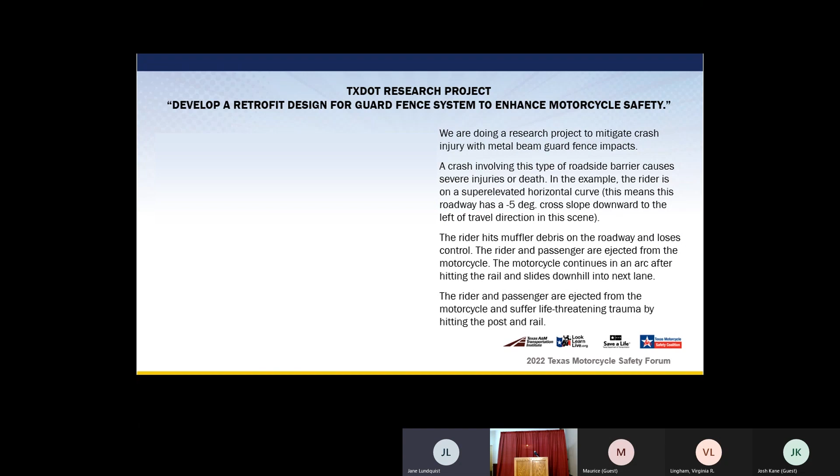The original design that we looked at to try and mitigate these kinds of barrier collisions and the dangers they present was to put a skirt on the post and a cap over the rail. We thought this would help. As you see, when someone hits a post, it's almost like a knife. I mean, it's going to take fingers, arms, heads, legs, whatever.

So we don't want anyone hitting that post. We're trying to protect the riders if they are ejected from their motorcycle. So you can see in the diagram on the right that we have the cap, and we also had a skirt underneath that block out. What it looks like is what you see in that left photo.

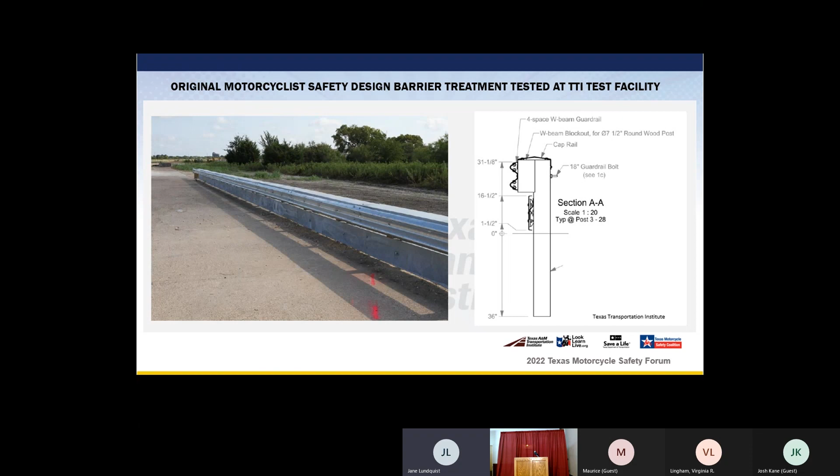Let me introduce this. This is the TTI testing facility, and out here we were doing upright rider cap rail tests. So if you can make that video go, just give it the start.

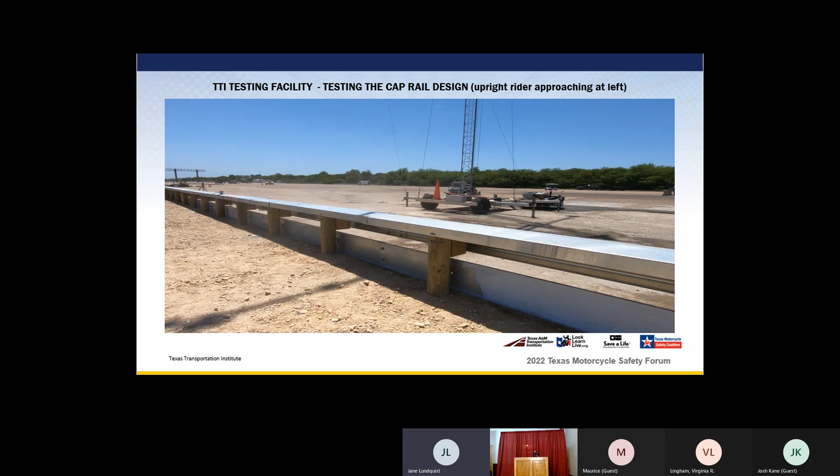As you can see, the rider was able to slide across the top without hitting the top of the posts, and they were not hitting the top of that metal beam, that W beam at the top there, the sharp edge. So let's go to the next slide and see it from a different angle. If you start the video.

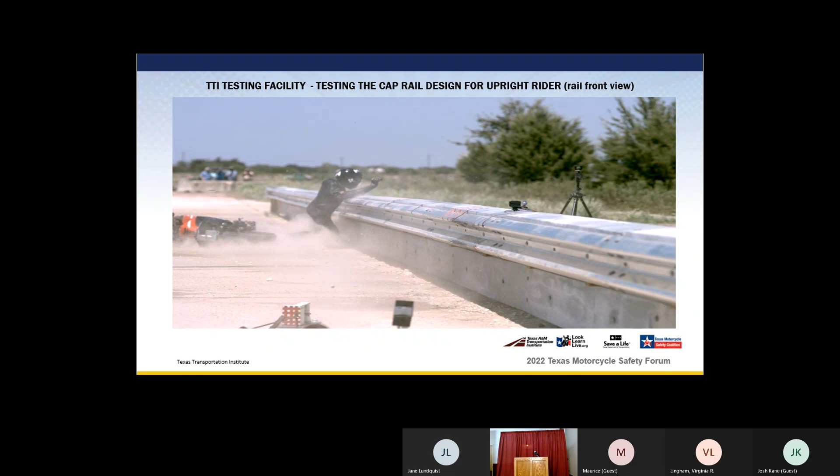As you can see in this video, the rider is protected across the top as they slide across that cap. It keeps them from being cut by the metal beam guard fence itself. It is a violent collision with a metal beam guard fence, but the top of the cap worked and it passed its testing.

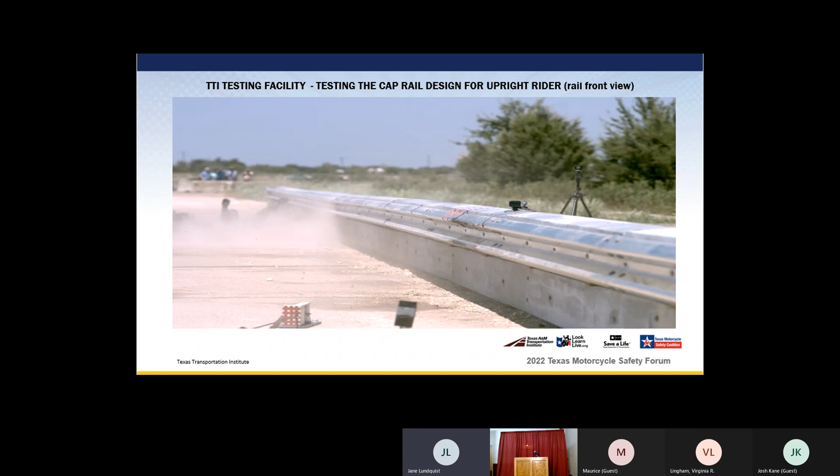Let me go to the next slide, please.

We also did a sliding rider check because sometimes when someone's ejected from the motorcycle, they go sliding off on their own while the motorcycle goes in another direction. In the upright rider videos that you saw, the cap worked well and it met the criteria we were designing for. However, when we tried the sliding rider impact with that skirt panel, we did not have satisfactory results, so we've had to go back to the drawing board and do new testing.

We can go to the next slide.

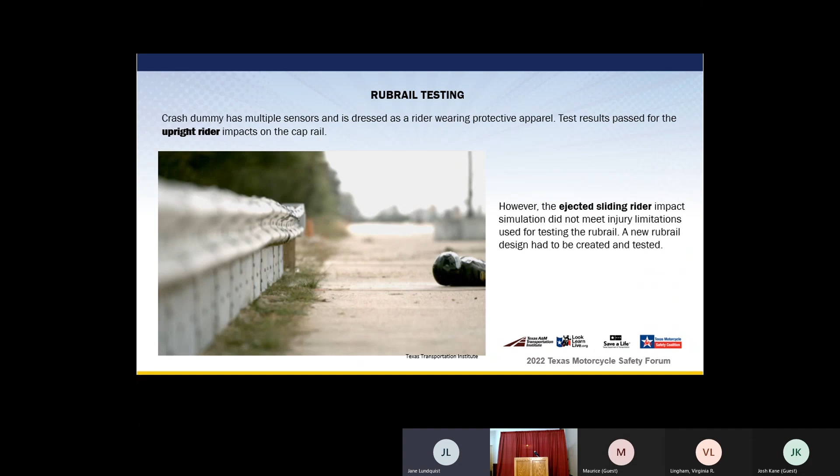What we've done here is left the cap in place because that seems to work. The W beam is that thing that looks like a 3 on the side there, that's the typical beam on a guard fence. But below, instead of putting that skirt up against the post, there is a Z bracket which will absorb the energy from the motorcycle or the rider hitting it. So we feel that's going to work better for us.

We've had some issues with COVID protocols where we weren't able to do some of these tests, but they are increasing now. I think they're scheduling more, so we may have some better results coming up soon.

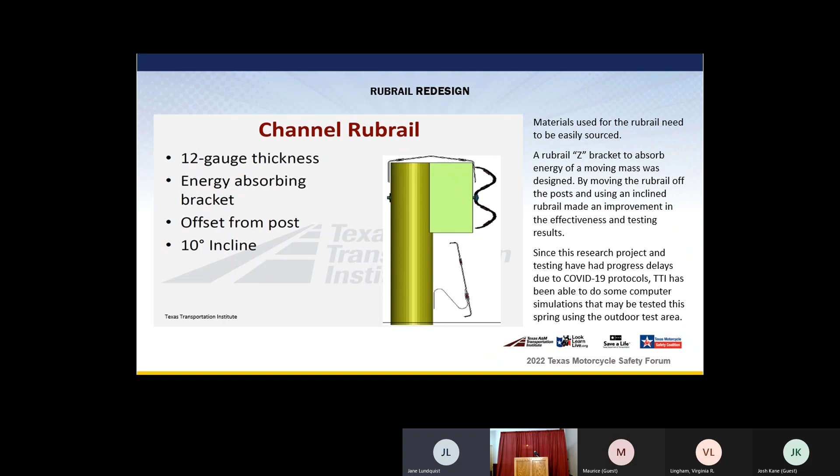We can go to the next slide, please.

TxDOT is the lead organization for a National Pooled Fund motorcycle study. As I introduced before, we have 5 other states joining with us. It's similar to the TxDOT research we're doing, but we're using a cooperative approach to find safety solutions and up-to-date examination of best practices for motorcyclist roadside safety that may be used in other states. We can share solutions and find ways to treat problems we've had difficulty resolving. We will be trying to implement any of these designs into the MASH manual.

If we go to the next slide, please.

TxDOT is also working on trying to provide better pavements at curves. Although this roadway is not in Texas, it looks like it'd be a daunting road to ride because you'd have left curves and right curves. But anywhere we have moisture in the shade, anytime there's moisture on the road, we have problems with friction that holds us, and we can't make our curves meet safety turning ability. So we are trying to review crash history and focus design attention on areas that may require better skid resistance and maintenance needs. We do have high surface friction materials that we put on curves, and although it's not a blanket change for the whole state, we focus on the areas where we've had issues and where we feel it's beneficial.

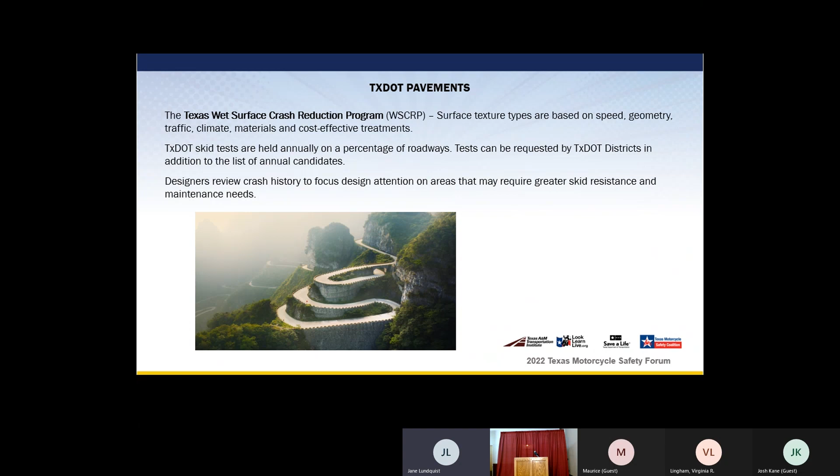This is something that we have brought to the attention of the Federal Highway Administration.

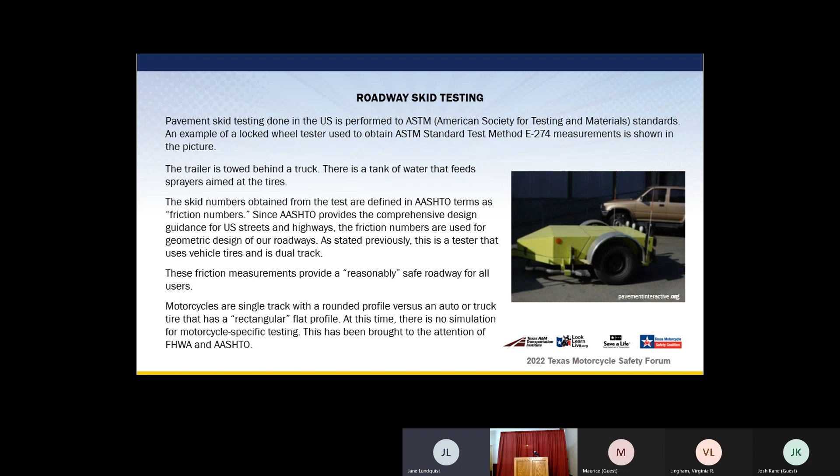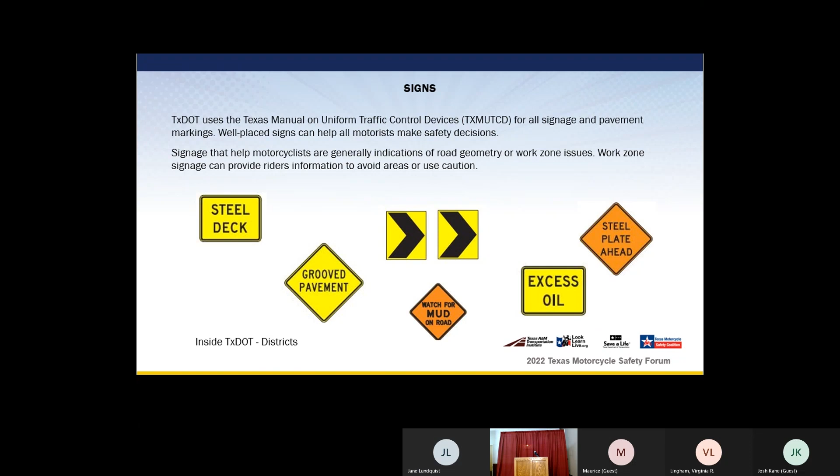If you should be on a ride and find a problem with a road, I know that we have wayfinding being tried and used to notify riders about issues. But to report a roadway problem and have it repaired, go to inside TxDOT, select districts, find the district or county, and there's a selection there for the county where you found the problem to report it. I believe the email for the district engineer is there, and administration of that office will make sure the information is passed along to the appropriate area office so they can examine the issue and get it fixed. We don't want to leave a pothole or hazard on the road. So if you find something and want to report it, go directly to the website and speak to the people in the district.

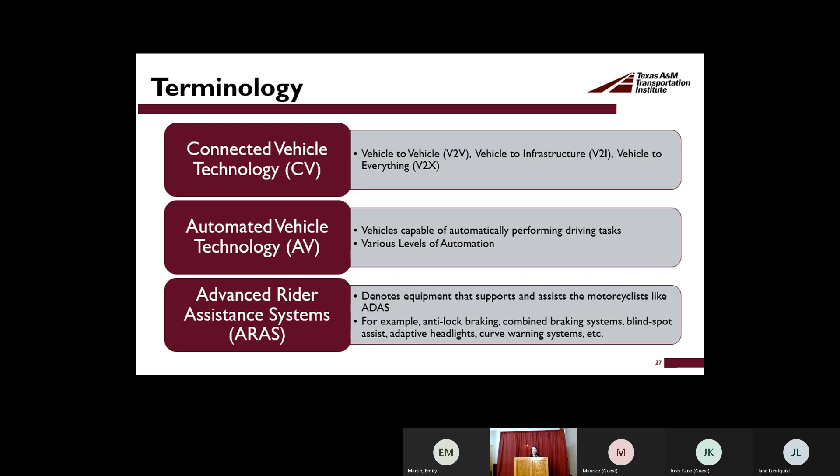But for this project, we are really trying to understand, from the federal side and for riders, what their thoughts and feelings are on both connectivity and ARAS specifically. But our findings, they could apply to automated vehicles.

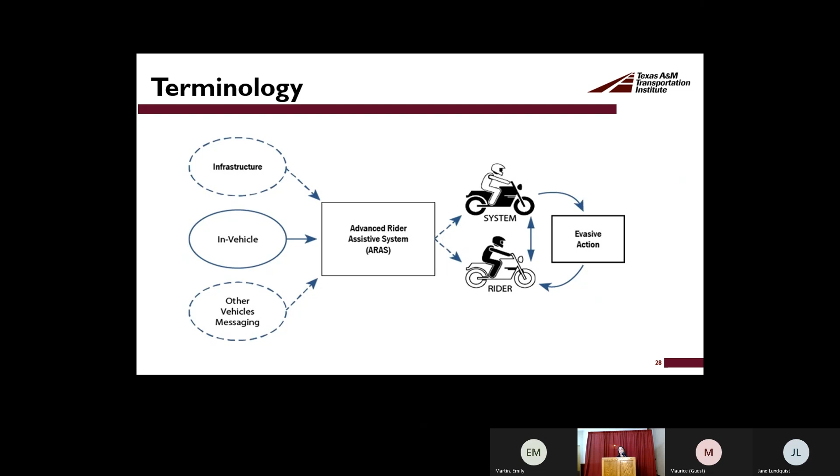So looking at the potential impact, and the reason why crashes and fatalities are very much overrepresented - some have even said this is a global health problem. About 3% of registered vehicles in the United States are motorcyclists, but yet they account for about 14% of fatalities. And this is even seen when comparing motorcyclists to drivers when you look at VMT rates.

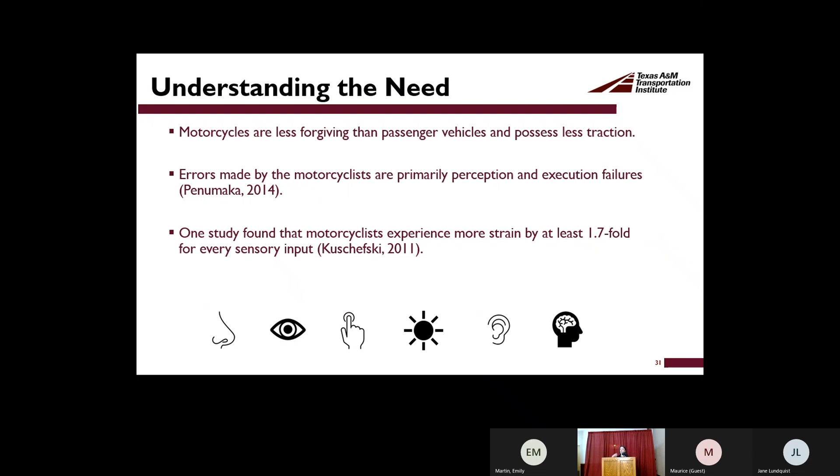Part of this problem we found through our research, and focus group sessions, is that the margin of error for motorcycle riding is much less than that of a passenger vehicle, and often this leads to both perception and execution errors. One study even found that when comparing a motorcyclist and driver, often motorcyclists are experiencing sensory inputs by at least 1.7-fold of their passenger vehicle counterparts. So this includes vibration, noise, climate, making it much more difficult to stay focused, but also puts a very big emphasis on having high situational awareness throughout riding.

So where connectivity comes into play is it's really that extra layer of safety. Starting with the first layer, most basic being your PPE, but having connectivity is providing maybe perhaps more separation between the motorcyclist and the roadway.

And I think also my last slide might have been a little misleading, but there's also a lot of drivers that cause accidents with motorcyclists, and often about 70% of those are due to perception errors on the driver's end, so not seeing the motorcyclist. Having connectivity can not only increase the motorcyclist's visibility by informing the driver that they're nearby, but then also inform the motorcyclist of upcoming conditions so they can stay prepared.

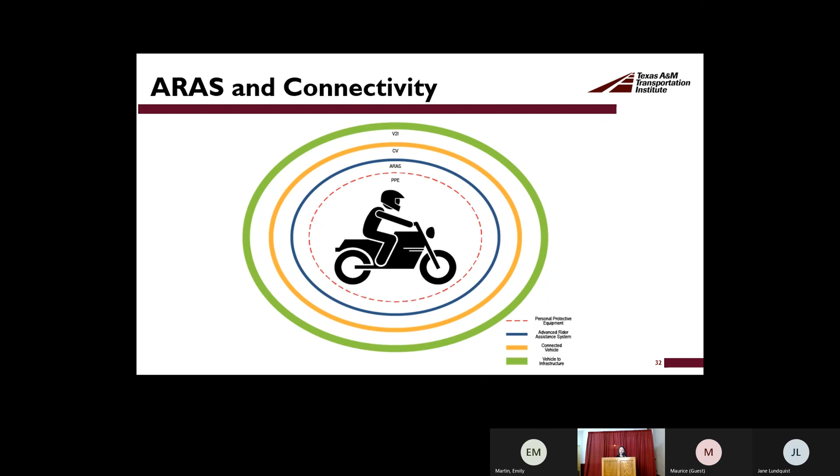So the Connected Motorcycle Consortium, they are a collaboration between researchers, suppliers, manufacturers, where they're really trying to integrate connectivity into the motorcycling community. They have come out with system architecture and different applications on what connectivity in motorcycles could look like.

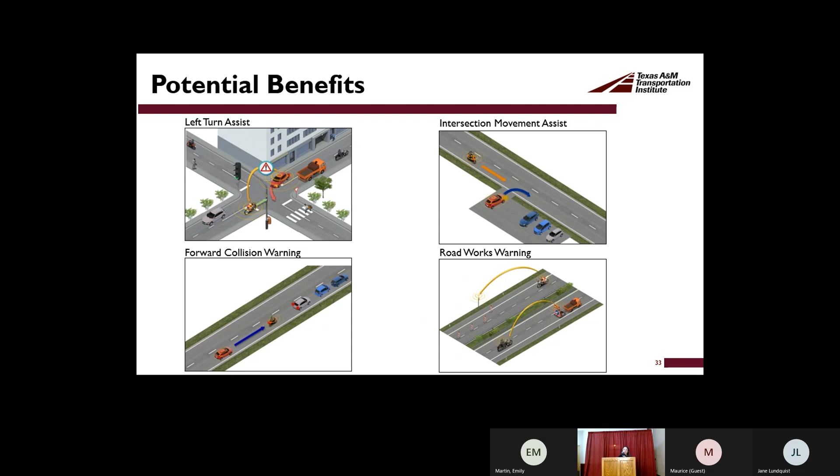So our literature review really indicated that there's huge research gaps in really what the warning intervention and timing should look like in sending these messages to motorcyclists. Because although they could add a safety value, if they're too distracting, they either will not be used or could potentially cause more harm than good. But then also there's other design concerns in terms of the motorcycle's ability to lean and the fact that it sits low, having a small surface area of where antennas could be placed as well as sensors.

But even if we were to drive in a world of just connected vehicles, how accurate would their detection be of motorcyclists? And then finally, our group agreed that more comparative analysis needs to be conducted. What would yield the maximized safety benefit? Would it be having a world of just connected vehicles where motorcycles are excluded, but they still emit a signal to drivers to inform them they're on the roadway as well? Or would a mix of vehicles being connected, motorcycles and passenger vehicles, yield the maximized safety benefit?

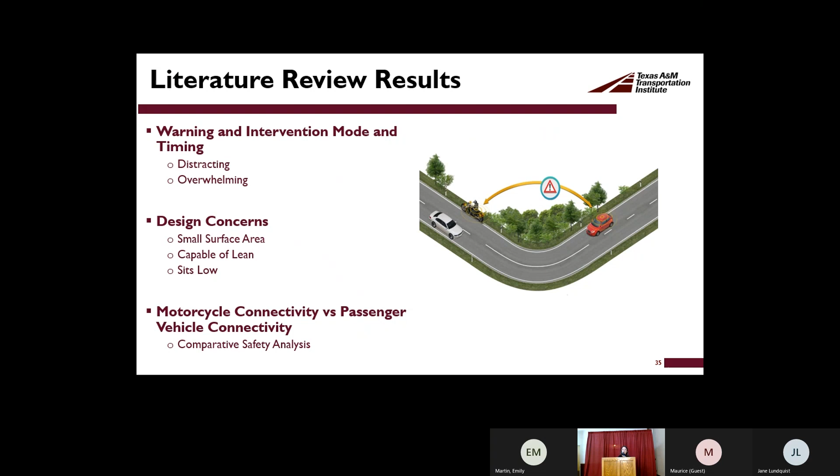So a listening session that we conducted included FHWA members and NHTSA members. Throughout this discussion, we really wanted to understand what future work needs to be done in order to integrate connectivity into the motorcycle community. And we identified through this listening session 5 primary research focuses.

Looking at the top 3: one, assessing current machine vision systems and understanding if, as vehicles become more advanced, setting standards on their detection of motorcyclists, which leads into creating performance standards for connected and automated vehicles to include other users of the roadway, to ensure that in all these scenarios, they are detecting most accurately.

And then finally, rider trust. We could deploy this technology, but trusting and actually using the technology is a totally different story. Integrating into the community will take time and also perhaps a small learning curve.

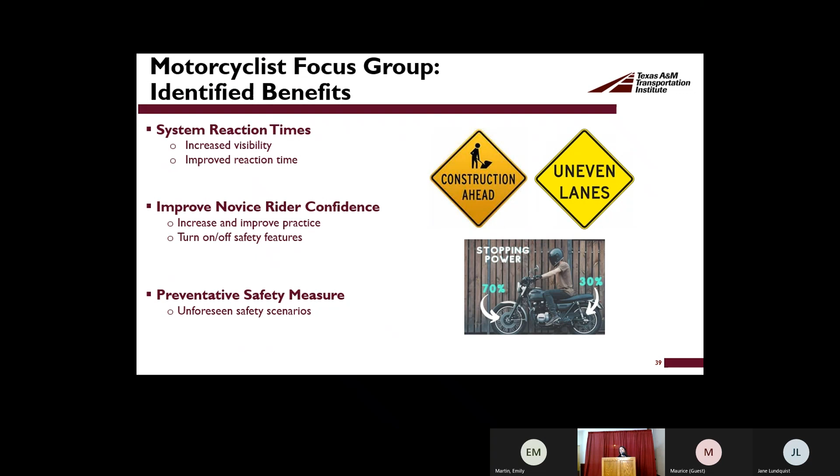But this was more with the caveat that these focus group members really made sure to make the point that they would want these systems to be able to be turned on and turned off. And then finally, also use these systems as a preventative safety measure. Some scenarios are not necessarily predictable, so having connectivity, again, could be that added layer of safety.

Some of the primary concerns, though, from these focus groups: riders being over-reliant on this technology to the point where they wouldn't develop the appropriate skills to be an expert rider.

Situational awareness is a big factor in being a successful rider. And if folks were to become over-reliant on this technology, who's to say that they would ever get the true manual experience, especially in scenarios where this could malfunction? How would riders respond then? And once again, maybe put them in more harm's way than add safety to their riding.

But then also, like we mentioned earlier, another concern was warning display distractions. They also brought up the point of rider interaction with autonomous features. If there were to be any jerky movements, or if the rider's choice was not aligned with the automated feature, would the rider respond in such a way that would make them less stable?

And user acceptance, concern that the community may reject this technology because, as they explain, riding is about being free, and having this technology may take away from that.